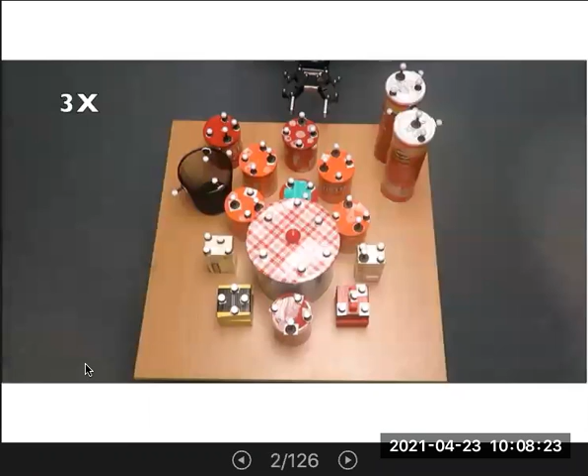The type of tasks that I am very interested in are these physics-based interaction tasks. And here is an example. Here there's a robot.

Can you see my pointer? You can see my pointer. Is that right? Yes, Mehmet. Yes, okay.

And the task here is to reach for that object with the green tape on it, and for that it needs to push on these obstacles. There's a virtual barrier on top, so it can't go from the top. When these obstacles are pushed on, they will interact with each other, obviously. So it needs to be able to predict how that interaction will continue, and it needs to make sure that the target object gets into the hand before other objects. It needs to make sure things don't fall off the edge of the table, and needs to be able to predict the physics of this interaction and generate actions that will reach the goal. So this is the kind of tasks that we are interested in.

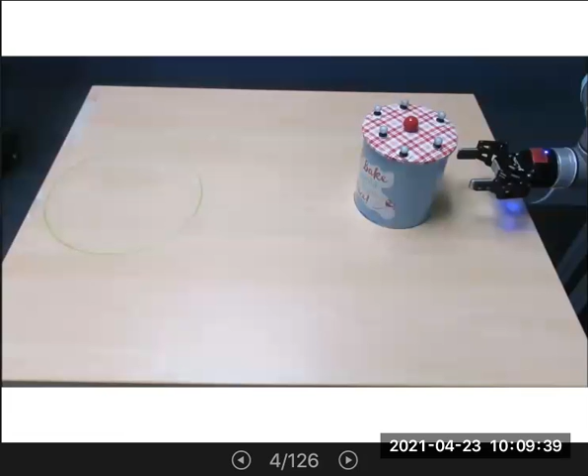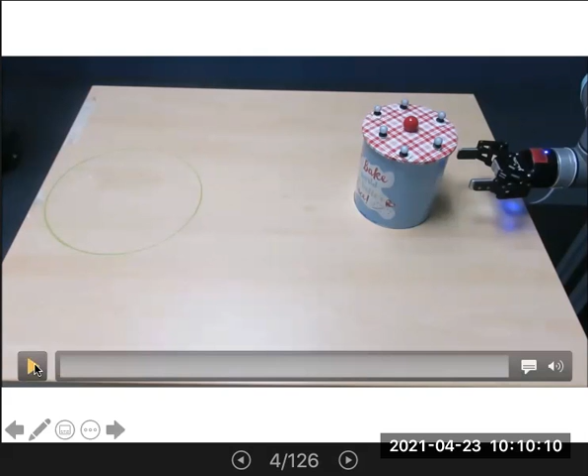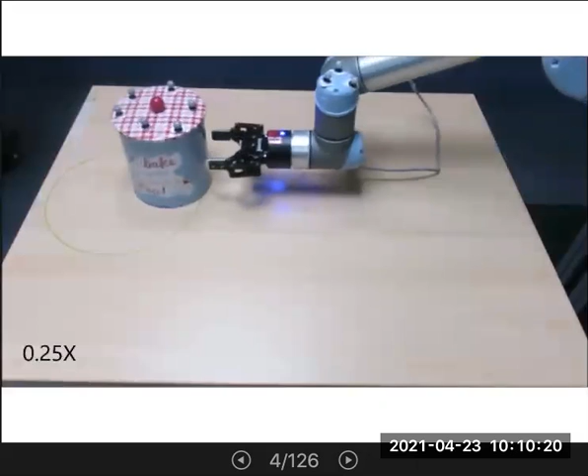And other aspects of physics-based manipulation, where physics models play a big role: we are interested in the accuracy of the physics models that you actually need. To give an example, if the task is to push this object into this large green region on a large table, the robot can be fast, and even if it has uncertainty about its actions, it can still do that. One controller should be able to adapt to tasks like this, but also the same controller should be able to adapt to tasks like this.

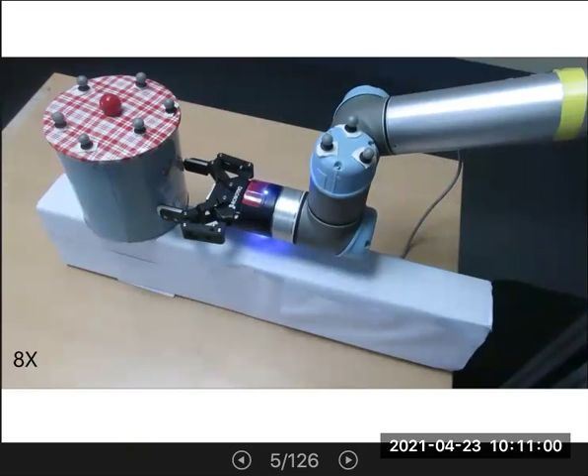It is a very similar task, but now the constraints are much higher, in the sense that the target region is much smaller. The strip that the robot needs to push the object along is much narrower, and then the robot needs much more accuracy and a much higher certainty in its actions, and naturally slows down and tries to make sure its actions will move the object where it wants it to move. So we are interested in physics models being more or less accurate and being able to use these in a task-adaptive fashion like that.

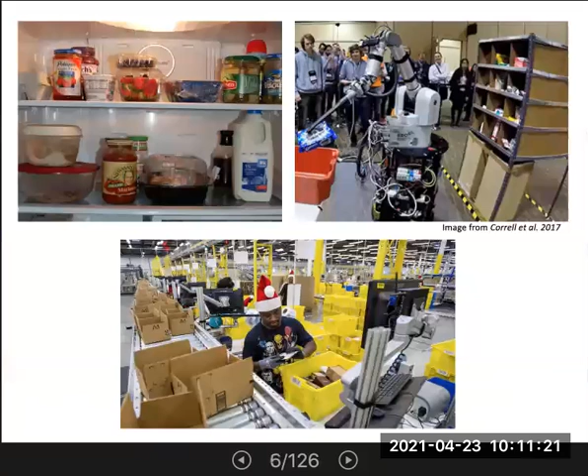In general, this is just to give you examples of problems that we are interested in. But taking a step back at the higher level, why are we interested in these tasks? Because our human environments are cluttered environments where just detecting one object and reaching for it may not work. The robot may need to push on things, topple things.

So a real physics-based interaction is needed, and not only in human home environments. As some of you might know, there has been this Amazon picking challenge, and in a real Amazon or any other warehouse, someone needs to reach into bins like this, where there are multiple objects, and you need to push these to the side and reach for an object and get it into the box, and there again maybe nudge other objects to squeeze that one in. So these are all examples of physics-based interactions where predictions about how objects will move when the robots or other objects make contact with each other is important.

And the problem is how to plan and control robot actions to perform such tasks. That is why we're interested in it. And again, this is the application side, but on the more science side, what I have been interested in for the last 10 years is going beyond geometric motion planning. So motion planning has mostly focused on this idea of collision-free robot motion, where you are given a start position and a goal position and a geometric model of an obstacle and a robot. And then the problem has been generating this motion to avoid contact.

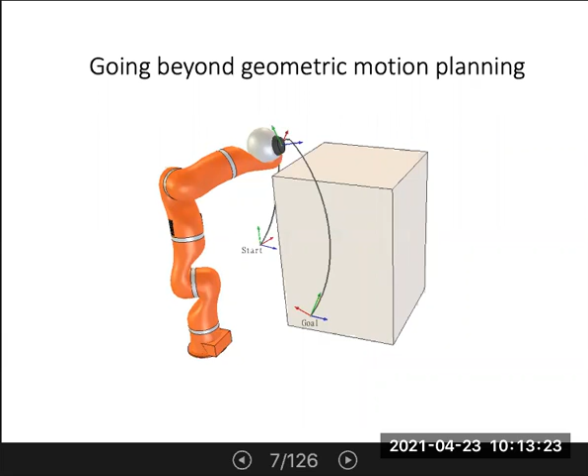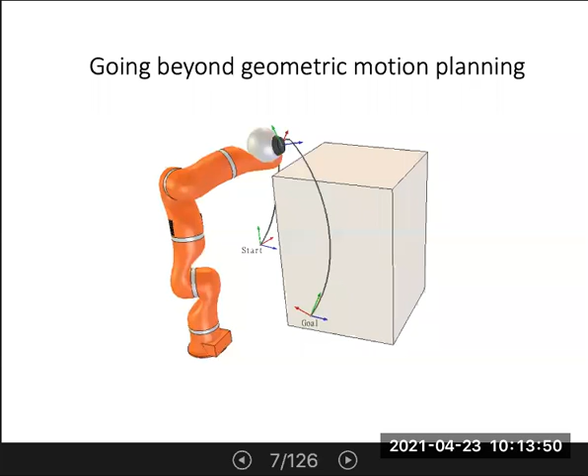And we have made great progress along this, but the question is, how can we generalize from that to move beyond geometric models of the environment to physics-based models of the environment, where then the robot can search for actual physical interactions that will reach the goal. Of course, this increases the dimensionality, this increases the uncertainty. So there are a lot of problems that come with that, but that is where I am interested in going. So that is my high-level vision in my research. So this is what I mean by physics-based manipulation planning.

Now, we have been doing some work at Leeds over the last 5 years since I've been at Leeds, and I will mainly talk about those. But first, I want to take a step back and give a brief overview of my work since my PhD and postdoc to basically motivate what I have been doing then at Leeds. I can divide these phases into two easily, because before coming to Leeds, I was mostly working on generating open loop physics-based plans. Until I start talking about closed loop, basically everything I present will be about planning open loop actions.

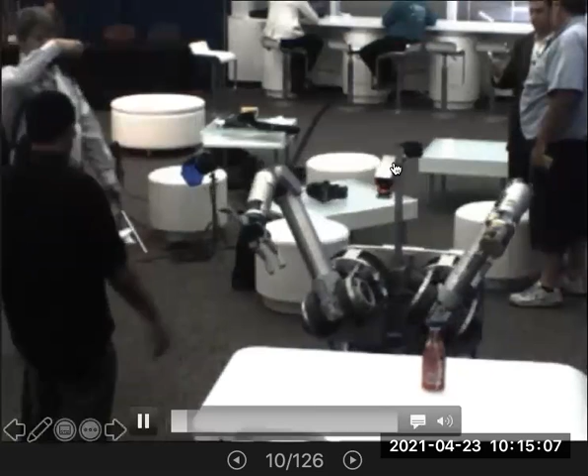When I say open loop actions, the robot looks at a scene, creates a sequence of controls, actions, and just closes its eyes and executes it. And that has been the question: how can I generate such open loop plans? That was the question that I looked at back then. And this was motivated by the robot I was working on, which would use its sensors to detect an object, and it would do regular grasp planning and motion planning. It would plan a grasp, move its arm there, close its fingers, and it would grasp the object.

And this kind of approach was based on traditional motion planning and grasp planning. Basically, there's the grasp planning approach where you search for force closure grasps on an object. So given a hand model, you look at where your fingers make contact with the object, and you can look at the frictional interaction at those contact points between the robot hand and the object model. And then you can analyze that situation to see if that hand pose, when the fingers clamp on the object, will give you a good firm grasp.

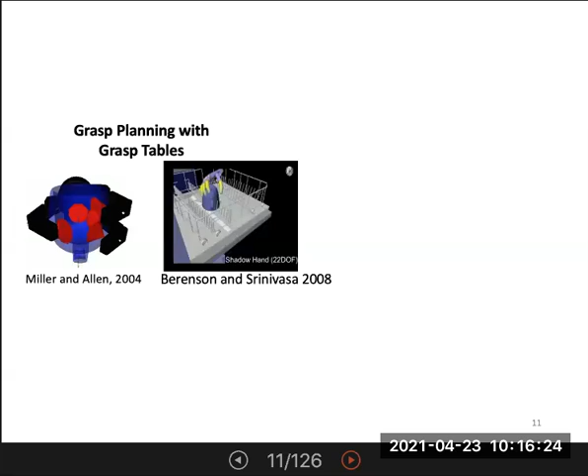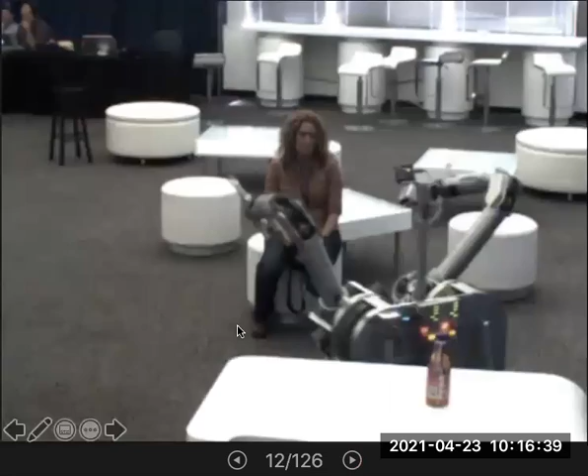Then, given an actual scene like this, and given a hand model, you can search for different positions for the hand to be, and look at where the fingers will lay in terms of the contacts on the object, and then you analyze that. Once you find such a good hand pose, what has traditionally been done is a motion plan: wherever your arm and hand currently is, you do a collision-free motion plan to move the hand to that planned hand pose, and then you close your fingers. So that has been the system that we have been using on this robot. But while it was successful at certain times, it would not work at other times. So here again, the camera detects the object, the hand moves there, and it fails. And the reason why it fails was uncertainty. The camera tells us the object is here, but actually the object may be a bit off, or maybe it's here, or maybe it's here. So these are all possible poses for that object.

And the way I became interested in physics-based interaction was actually initially because of this uncertainty. Back then I was taking a class from Matt Mason. Some of you who work in object manipulation may know him; he has been interested in pushing, and he has used pushing actions to reduce uncertainty.

And I was interested in basically using some of those methods in a case with a hand like we have on this robot, and planning actions such that when we have a grasping task, we can use pushing to guarantee that all those different hypothetical poses of the object would funnel into the hand. And so that even if we are uncertain about the object's pose, we can still grasp it.

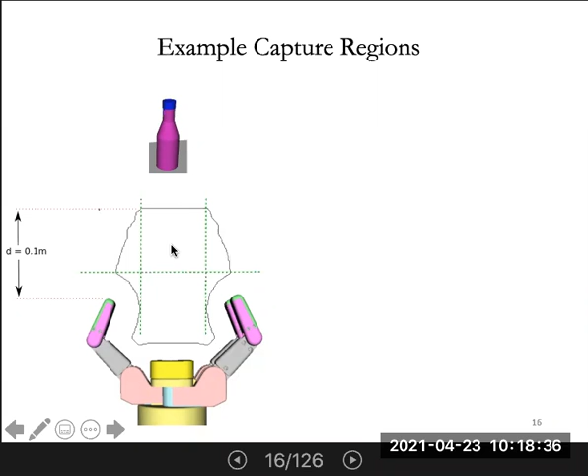Okay. And basically, in my PhD work, I analyzed the interaction between the hand and objects and came up with what are called capture regions. So this black curve here is a capture region of a certain pushing and grasping action. That's pushing and then closing your fingers. This is for a circularly symmetric object, but if the object is not circularly symmetric, these capture regions would have 3 dimensions, where the vertical dimension is the rotation of the object. But basically, this was to deal with the uncertainty about the pose of the object.

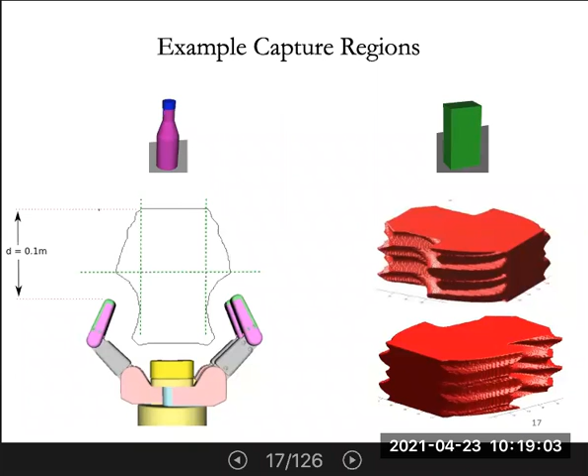And while that was my initial plan, one thing that I realized was that this pushing action was also useful in grasping objects in cluttered scenes. So like this one, where the robot was able to, in addition to reducing uncertainty, for example, if the goal here is to grasp this box, while it may not be able to put its fingers here and here on the side of this box to grasp it in its original position, it was able to come up with these pushing actions to also move them such that they were graspable, right? So

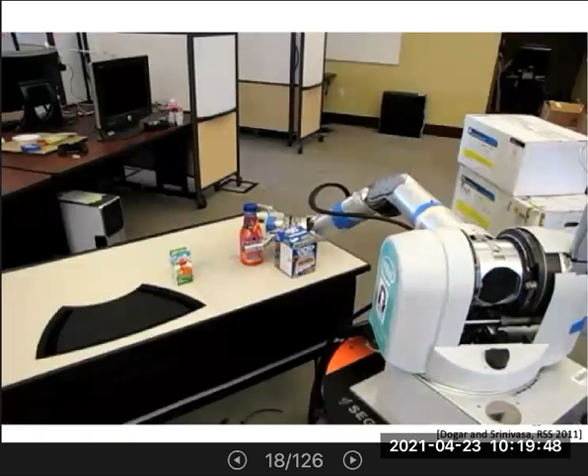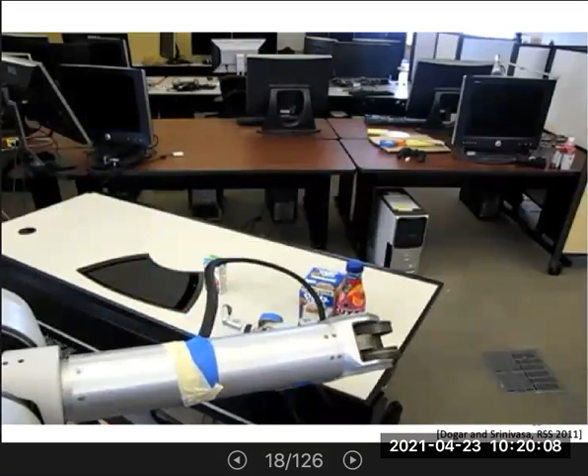then we started thinking about, oh, okay, so this pushing thing is not only useful for reducing uncertainty, but also for grasping objects in clutter, because you can move objects away from clutter where you can then grasp them. Which was interesting, because that was also something not possible when you take only the geometric motion planning approach, where you only have a geometric model and you assume that you have to grasp the object on the table wherever it is at that moment.

Then we extended that work, and we said, okay, if we are able to push the object we want to grasp, why don't we also think of pushing other objects, possibly obstacles, because obstacles may be moving out of the way, right? So, and then I worked a bit on these motion planners that can make contact not only with the object to grasp, but other movable objects in the scene.

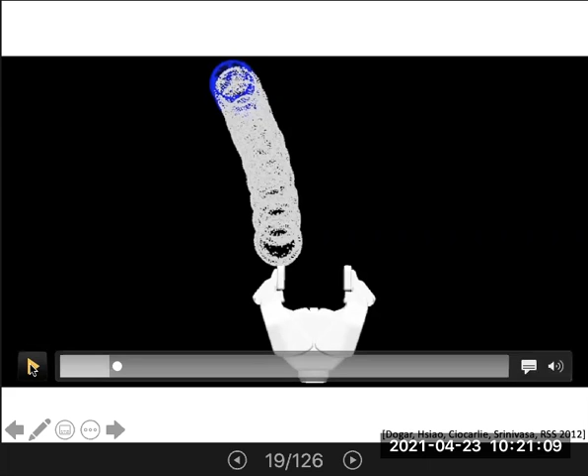But again, here, remember that I am using the open loop paradigm still. So this planner was looking at how the objects were predicted to move according to a physics model. And it was generating that whole plan and then just executing it. Okay, so once it generates a plan, it closes its eyes and executes it. I just want to emphasize that this is all still open loop,

but it was able to generate grasps like this, for example, where our goal is to grasp this can at the back, and all those arrows are different ways to approach that can. But the robot is able to predict how these other obstacles will move and pushes this particular way to approach it, which does push the obstacles away and then reaches for that can. Okay, so

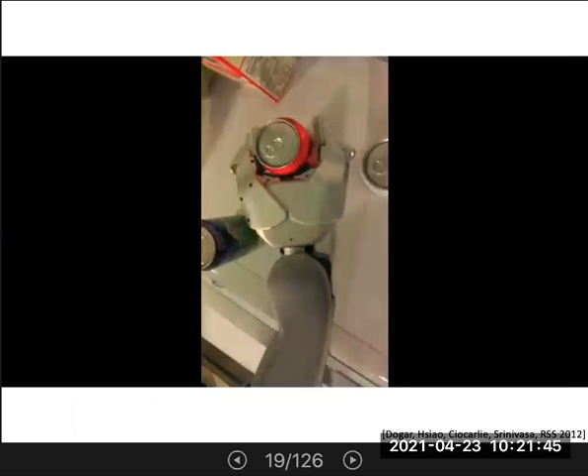now, though, one problem that we had in that previous method was that since we are using the open loop approach, and I think this is an important point that I want to get across, we really needed to have a small degree of uncertainty on the object's motion. What I mean by that is, if our predictions about how the obstacles will move were very off or very inaccurate, then the plans would fail. And to guarantee that, in the previous work that I just showed a video of, we would only plan actions where once we contact an object and push it, that object wouldn't contact any other object.

So what I mean by that is, while the robot was allowed to contact multiple objects, so multiple robot-object contacts were allowed, no object-to-object contact and pushing was allowed in the previous work. So we didn't want any object pushing another object. The reason was that the uncertainty in that case was exploding and our planner was often failing, and we were able to keep the uncertainty to a degree where we can still execute open loop plans only if objects were only pushed by the robot and objects wouldn't push other objects.

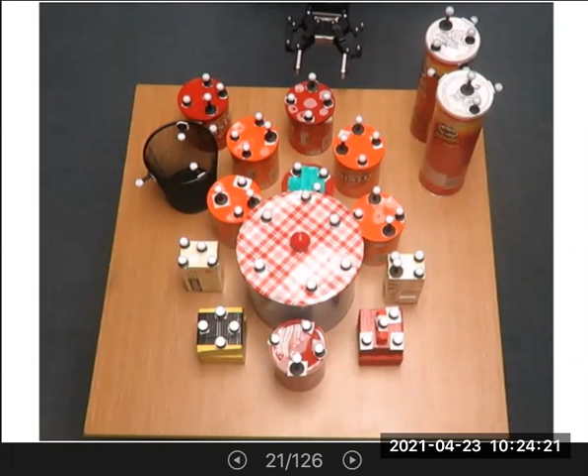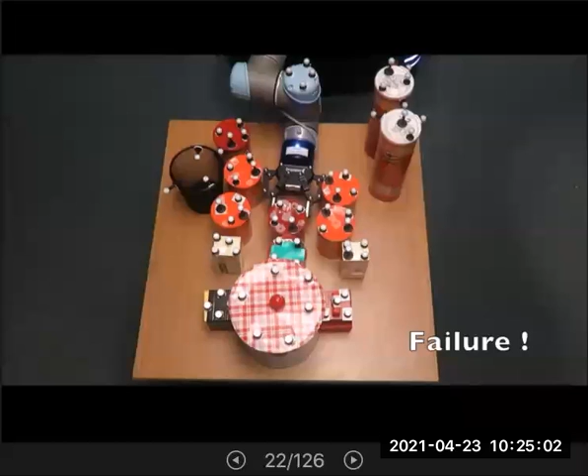Because in this setting, if you just do an open loop execution, this is just an example. If you just make an open loop plan and execute, here what we are showing is in simulation, in your physics model, it thinks that it will grasp the green object, but if you just execute it in real life, such multi-object interactions most often do not move according to your predictions, and then you can end up with failures. So that was the reason why we had to move towards a more closed loop approach.

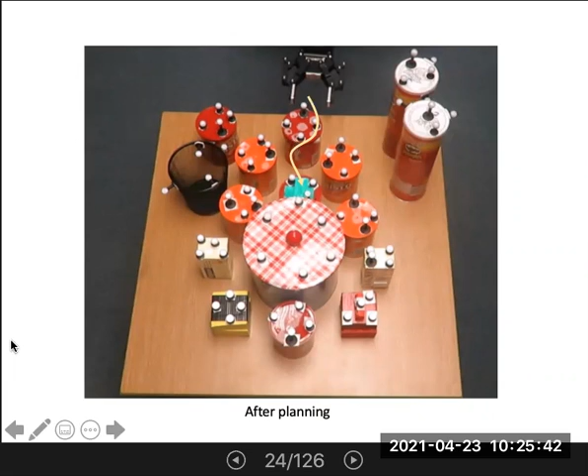Okay, so this brings me to our time at Leeds, where we took the approach of online replanning or model predictive control. So here basically we make a plan, and this yellow arrow, let's say, represents the plan that the robot generates to reach for the green object. What we do is we only execute the initial part of the plan for a short duration, and then we look at the environment again. We perceive the environment again, and we update our model of the environment according to how objects moved, which is something that we didn't do in the open loop case, right?

And then if things are going according to the plan, according to how we thought the objects would move, then we actually keep executing the plan. But otherwise, we would run a replanning cycle. So if objects move differently than we predicted, then we would replan. And when we replan, in model predictive control, one thing that you can do is what is called warm starting. That is, you don't have to throw away the remaining portion of the plan, but you can use that to initialize your next planning cycle with the hope that it will help you find a new plan faster than starting from scratch.

By the way, if there are any questions, please let me know. I don't know if I can see you when you raise hands, but please feel free to speak up as well. If you raise hands, either Martin or I can spot it, or you can say something in the chat and we can call on you. Okay, so Mehmet can go on and we can take charge of interrupting. Go ahead, Mehmet. Yeah. Thank you.

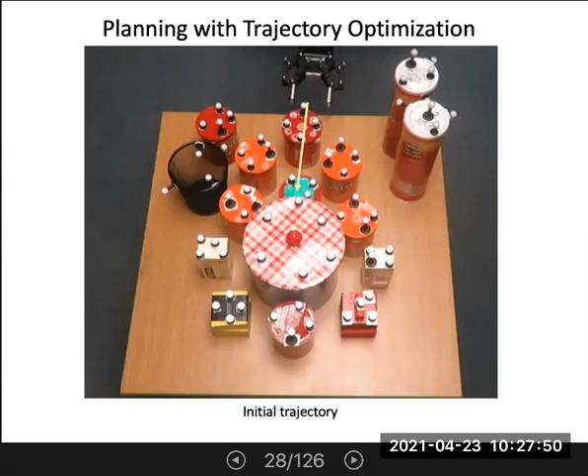We then frame this problem as a trajectory optimization problem, where you start with an initial trajectory, for example, a straight line trajectory. Then you take that, this is a sequence of controls and states, and you optimize it according to some costs. We devise some costs according to where the target object is, and the terminal state of the final position of the hand with respect to the target when you execute that trajectory. We also added some costs according to how close an object is to the edge of the table, to keep objects away from the edges. As objects got closer to the edges, we impose some penalties on the cost. And that's an optimization problem where the constraints are coming from the physics model. So here F is the physics model that maps the current state and controls to the next state, right?

And we used a sampling-based trajectory optimization method. For those of you who are aware of STOMP, we basically modified STOMP a bit to apply to this problem, and then we used that to solve these problems. And then we were able to generate more closed loop actions where we were able to actually push on multiple objects that would interact with each other, and we were able to generate these actions.

But there were still some limitations. Okay, what are the limitations? So first of all, this was slow. The videos were playing at 3 times speed, but actually, I will talk about a few different limitations here, and resolving those limitations does require us to do even more simulations in these planning cycles, and then if you were to do that, it would become even slower, right?

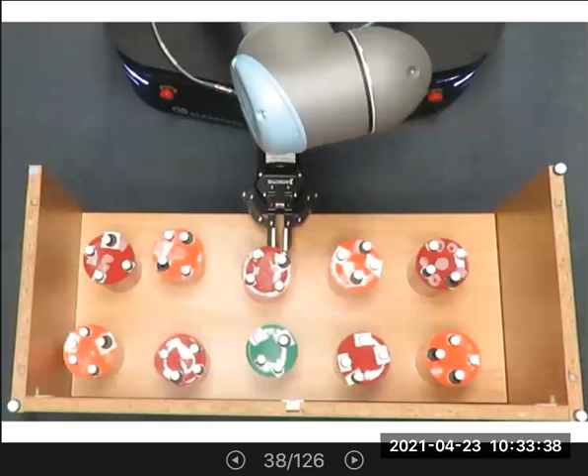I mean, we are able to run our planners in these cases as well, and sometimes they do work. So here is an example. This video is not sped up, and you can see how slow it is, which is also good. But we are able to, for example, in these simple cases, as you can see, this object is pushed against the edge. Even the goal object will kind of be pushed up against the edge. So we can deal with these cases sometimes when it is easy, but not robustly enough. So basically, that is another limitation of this system.

So in terms of the slowness of the approach, one work we did has been using learning to reduce the planning horizon. Okay, and I will talk about that. If that raises question marks about what that means, I will get to it. But that is basically the idea of not planning until the very end, but until a few steps into the future only, so that we can be faster in generating plans.

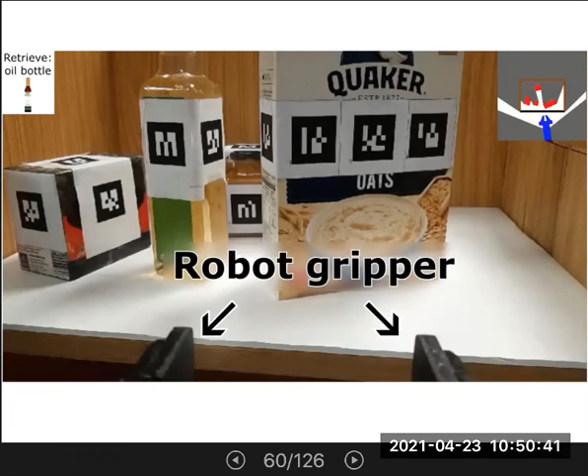So now we don't see all the objects, and we still use the same kind of representation, but this representation now also includes the shadows, which you can see as these gray areas here. You can see that the simulator image is still created from the top down, but it doesn't matter. In the real world, we have this camera on the robot hand that perceives these objects, and this is then instantiated in the simulator, and then this image is rendered in the simulator, and this is what goes into the neural network, okay? And this is where the model-based planning also takes place.

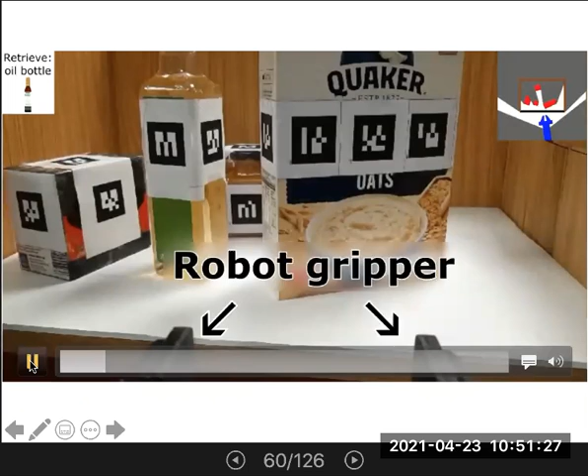What we tried as well was to train the same neural network, which would share the network. So the network would have not only the policy head, which would suggest the actions to execute, and the value head, which would suggest the values of certain states, but it would also have a prediction head, which would predict the target object location. Again, this would also be trained, obviously. So here, for example, you will see green object appearing in different places. Those are all possible places that have been predicted by the network.

Based on those predictions, the planner is trying to identify the object. If I go back, the object is actually behind this one, and the system will be predicting it in different places and coming up with actions. It is basically choosing the actions that, according to those predictions of the hidden object, give the most expected reward of finding the hidden object and grasping it. And this is the hidden object here, and then it goes and finds and extracts it. Again, we can initialize this with different objects to search for, and it hypothesizes these locations and then searches for them.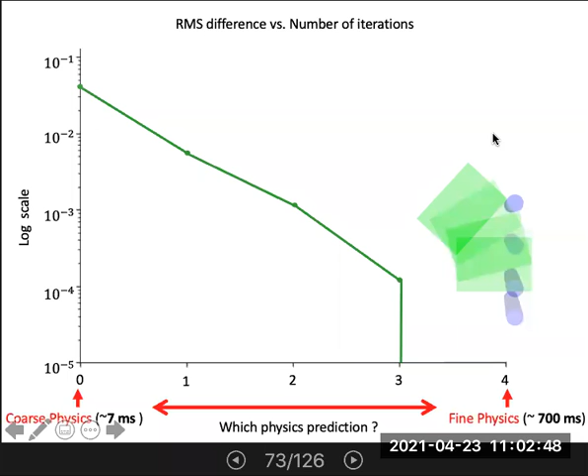Okay. But the thing is, we now have this spectrum of different models we can use, right? Starting from the very coarse model to running the simulator for the full duration, we have a spectrum of models with different accuracy, but also different computational expense, which we can choose. For example, there is this great work from Alberto Rodriguez's group at MIT, where they apply the same pushing action in the real world on the same object, and show that there's actually stochasticity, there's error in there. So even when you do this in the real world, there's stochasticity. So some of the accuracy we get from the simulator is useless accuracy. We are just overfitting to the simulator, right? We don't need that. So you can make do with running these simulators at a much lower accuracy. And if the task requires less accuracy, you can sometimes even make do with the coarse model.

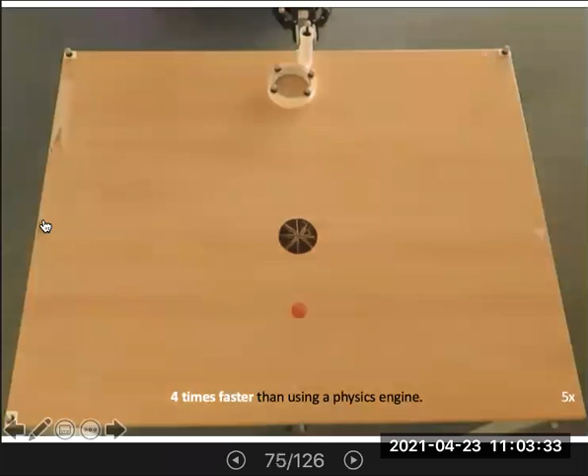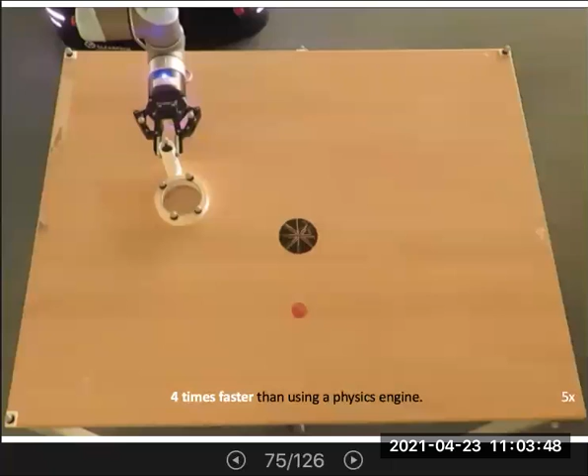So basically, he used this scheme to show that we can do much faster planning compared to running the fine simulator. We have been investigating these approaches to generating these actions. But he has also used this same approach to adapt the physics models to the task, for the examples I have given at the beginning of the talk, to decide what kind of accuracy we need from the physics model, depending on the task. For example, for this task, you may need only a very coarse model, so you can be very fast, but for this task, you may need very accurate predictions, so you may need to be slower. But the same controller basically adapts to the task.

Okay, so I think I am now at the 1 hour mark since I started, right? I know that we had 1.5 hours including the discussion. But I have more slides, so what I will do is I will be a bit faster for the remaining.

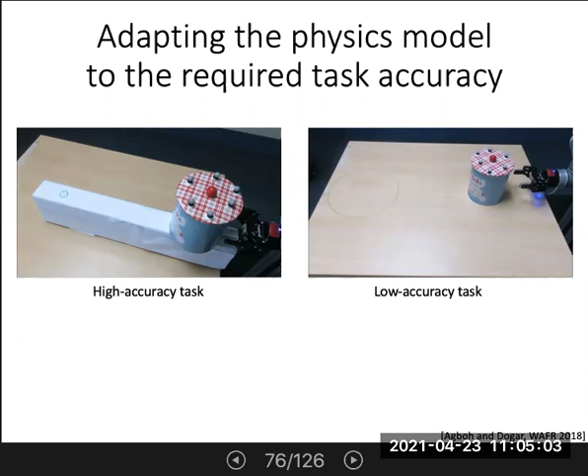But if you want to hear more details about what I will show after this point, let's leave it for the discussion, and I'm happy to go into the details. But I will skip some slides after this point so that I can be a bit faster. And the last point that I want to talk about in this context was the human in the loop planning,

and this is what Rafael Papallas and other students of mine have been working on, which was to deal with the problem of getting stuck at local optima, local minima, right? And Rafael's idea was that humans are good and quick at making high-level suggestions, and whether we can actually integrate such suggestions with local trajectory optimization.

So, for example, in a scene like this, again, if the robot wants to reach for the green object, and when you run the optimizer, it gets stuck. It says, I can't find a good solution for this one. What happens is that it goes back to a human, and the human can suggest to move this object here. So the arrow represents the human input. The human says, push this object in this direction. And this then gets integrated into the trajectory optimization in 2 ways.

One, it changes the initial trajectory. So the optimizer, remember, this optimization we always initialize, and we have been initializing it with a straight line or some other way of autonomous initialization, but we use the human input to change the initial trajectory so that we start from a different point for the optimization.

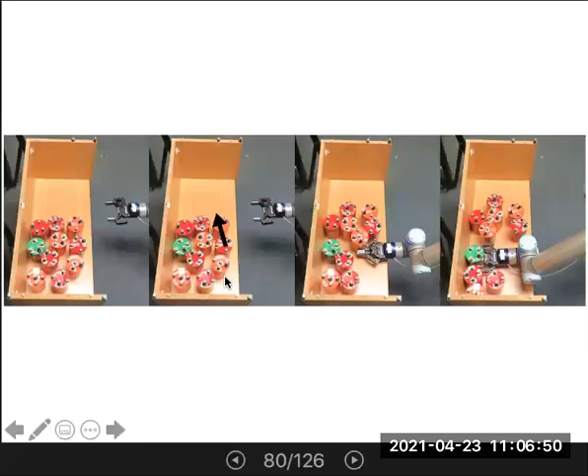But also it gets integrated into the objective cost term so that the robot, in addition to getting the object into the hand and not dropping objects off the shelf, which are part of the cost term that it optimizes for, after it gets a human suggestion, it also makes the suggestion part of the objective term so that it is also trying to push this object close to the point that is indicated by the human, with the hope that it will help it escape from the local minima and find the solutions. Okay, so the human suggestions are integrated into the trajectory optimization as part of the initial trajectory and as the cost term.

Now, one thing we wanted to do, of course, was we assume that there's a human who will help us, and we don't want to spend too much of the time of the human, so we want to minimize the human time spent. So Rafael implemented things such that the human input is requested only if the optimization is stuck at a local minimum. Okay, so if the robot is able to solve the problem by itself, it does. If it detects that it's stuck at a local minimum, it gets the human input and then it updates its optimization problem with that, and then it continues the optimization.

And the nice thing about this was, we tried to do this in a multi-robot scenario. So, the scenario we had was, your robot is in a warehouse, and there are lots of robots like this that need to reach for an object, and maybe there is one human operator. And here, we show all the robots at once, but you can also think of these being behind the scenes. I mean, we wanted to show them here because we wanted to make the point that there are multiple robots there. But in a real warehouse, you don't need to show the autonomous robots to the user. You only need to show the robots that ask for help.

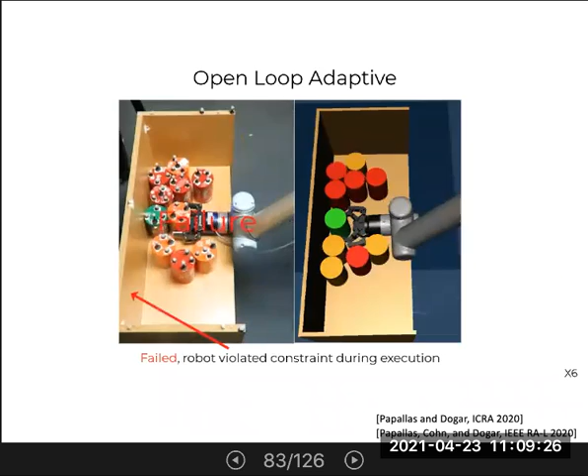And here, what you will see is that these robots are moving autonomously, and one of them decides that it is at a local minimum, so it asks for human help, and the human gives some help. As you will see the pointer of the human, and the white arrow indicates the human help, and that completes the task. And then this one says, oh, I need help as well, and some of the other ones actually work by themselves and then complete the task autonomously if they can. So this is an approach where we were looking at whether one human can actually control multiple robots simultaneously by high-level input. Okay, so here is, for example, that case where the human provides some help, and then the robot uses the human help to adjust the initial trajectory, which helps it actually solve the problem.

Okay. So this was basically what I wanted to talk about: physics-based manipulation planning, and this has been my focus. But as I mentioned at the beginning, let me just very briefly mention that we are also interested in collaborative manipulation planning. I did some work back in the day during my postdoc where I worked on multiple robots planning grasps on things and doing motion planning with them.

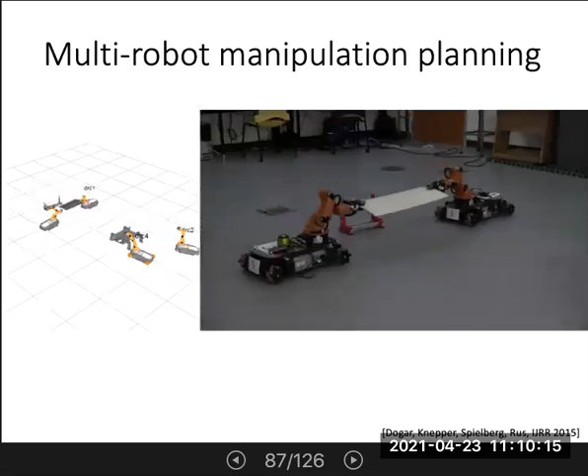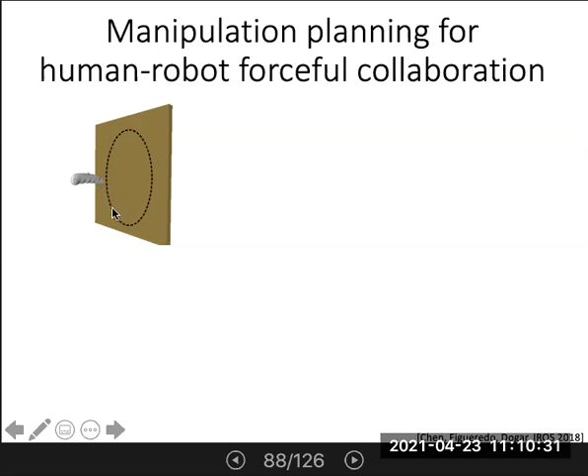And once I moved to Leeds, I was interested in doing this in a human-robot collaboration setting, and we are particularly interested in forceful collaboration. So if you have a board like this, if the task is the human wants to cut a circle, how can a robot hold the board for the human such that it will resist these forces, it will rotate the board to make it comfortable for the human, and complete these tasks collaboratively.

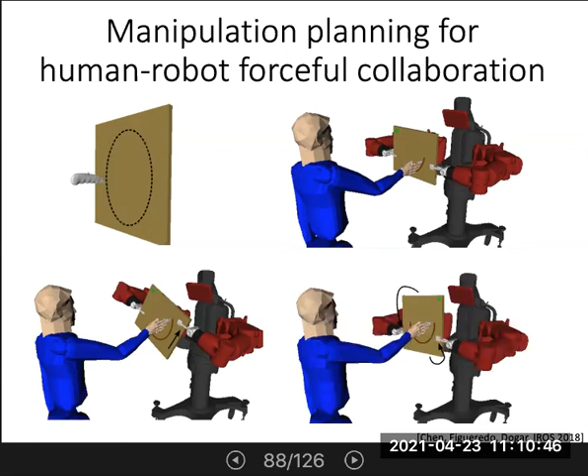Okay, so I had a postdoc, Luis Figueiredo, who finished his postdoc now and moved to the Technical University of Munich. And Lipeng was my PhD student who also finished at Tencent Robotics in China now. But so, this is about planning grasps that will resist the forces that will be applied.

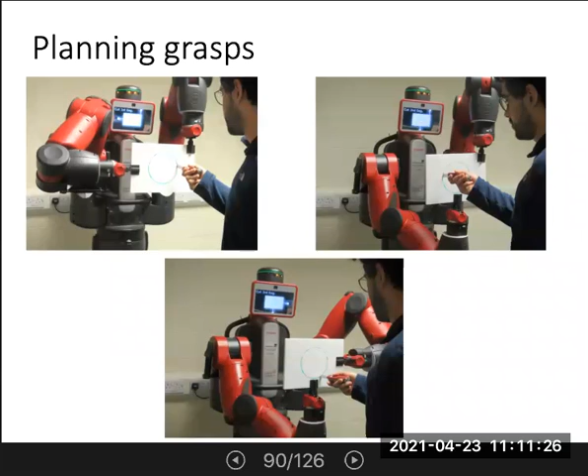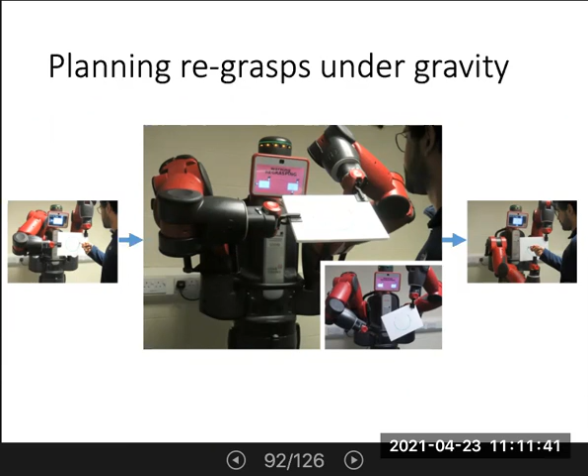So, if the forces here when the human is cutting are pointing upwards, the robot should pick the correct grasps. And as the human moves along the circle, the forces that the human applies will change, and the robot grasp should change. That is part of the planning problem, because otherwise there may be failures. But then there's also part of the problem how to regrasp the object, because the robot needs to change its grasp on the object as this interaction continues.

And people usually ask me, like, is the task given? Yes, we assume that the task, the sequence of forces that the human will apply, like the circle here, is given. Okay, so it is one assumption in this model. I will skip that.

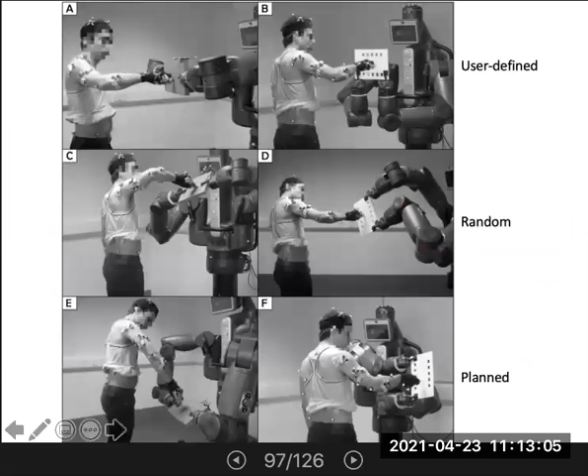But the final thing I want to say is that one thing we also looked at in this context was optimizing how to hold the board for human comfort, predicting what kind of muscular efforts and joint efforts the human will need to apply. Because if I wanted to hold something for you, I can hold it like this, I can hold it like that, and some of them will be more comfortable and less comfortable for you to do that. And we have actually done some experiments using EMG sensors and motion capture sensors to measure the muscle effort of people when they do such tasks.

And we have been implementing planners that try to minimize the muscular effort. So here, for example, this is user defined. So here the human chooses the pose. These are two different tasks. One, they puncture a hole. One, they cut along a line. This is when the human chooses the positions. This is random positions. And this is our planned positions according to our model of the human musculoskeletal structure. Okay. And we would measure using EMG readings what the actual muscle efforts are in these different cases. And we worked with some biomedical engineers for this to help us with those muscular modeling and measurements.